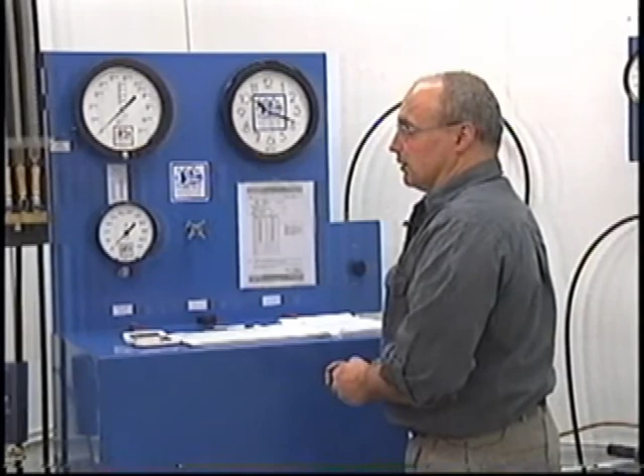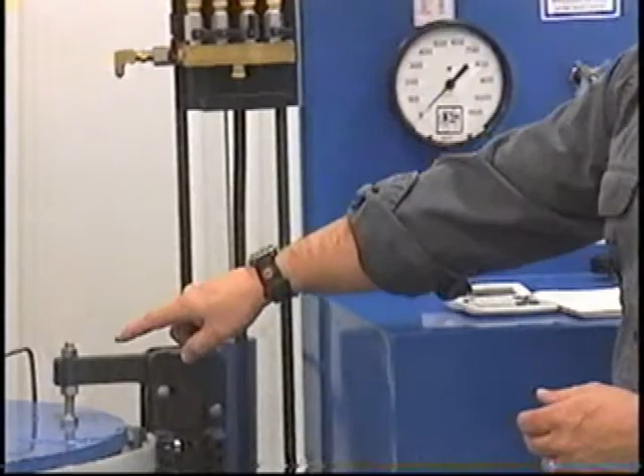The first step is you have your calibrated cylinder loaded into the water jacket. You have purged all the air out of that calibrated cylinder by opening up the low pressure bleed valve, turning on your water to the water jacket. Once water comes out of that bleed valve and goes up your burette that you've selected, you know that there is nothing but water left in that water jacket.

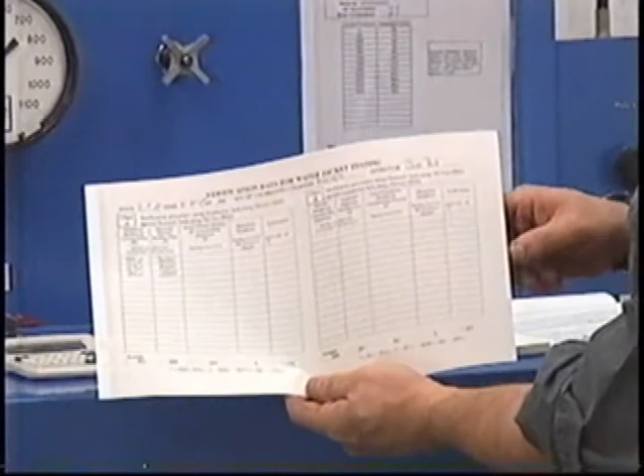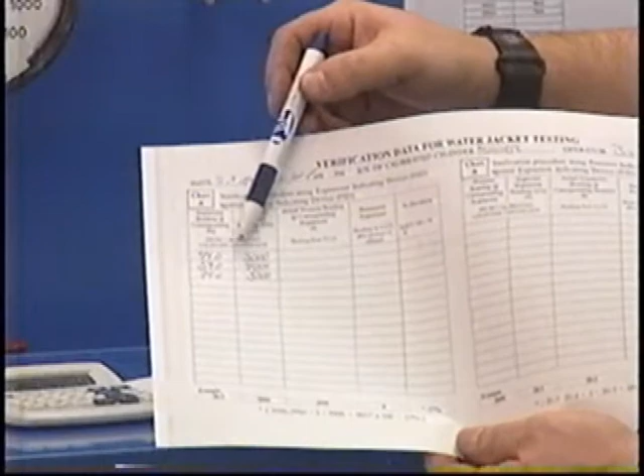Hydrotest has produced a form for the verification procedure, and this form must be kept on file. For this exercise, we're going to verify at 3,000, 4,000, and 5,000 psi. Our expected expansion reading at 3,000 is 44 cc's. At 4,000 it's 59 cc's, and at 5,000 it's 74 cc's. We got those readings from our calibration certificate.

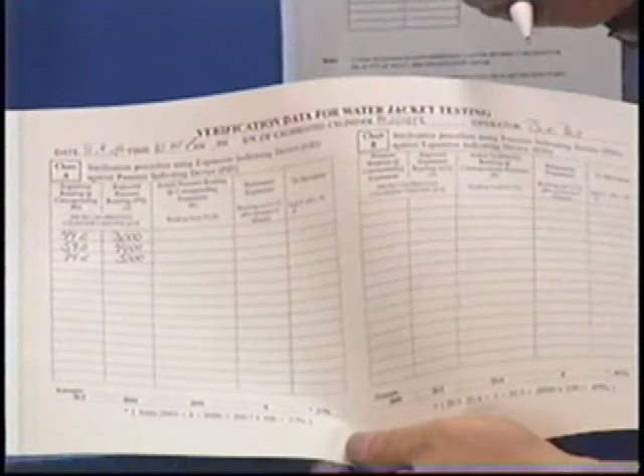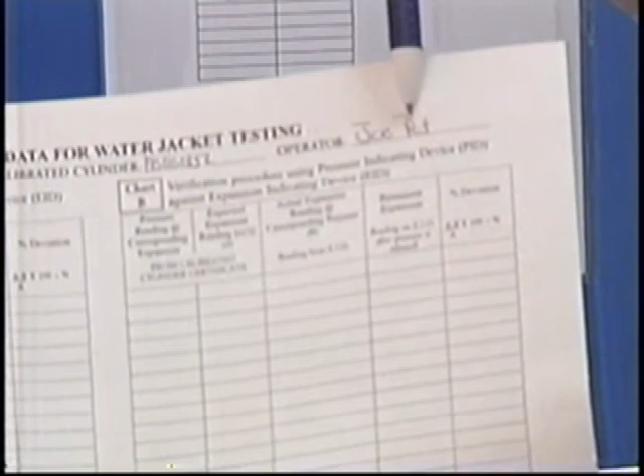On the verification form, you want to fill out the date, the time, the serial number of the calibrated cylinder, and the operator's name. There are two ways to run the verification procedure. The first way is Chart A, where we're going to bring up a known value of our expansion, check our pressure gauge, and make sure that we're within 1% of that pressure.

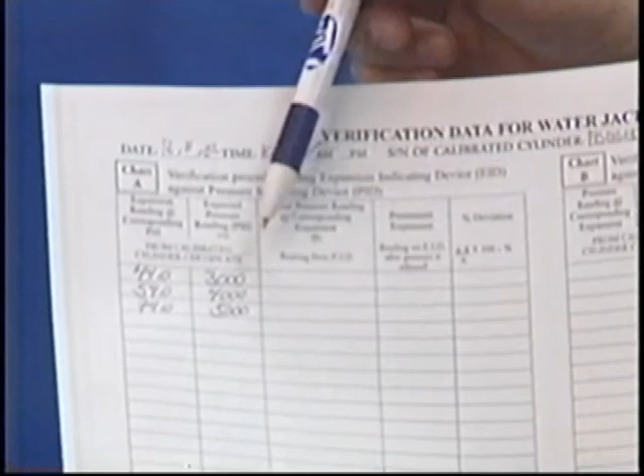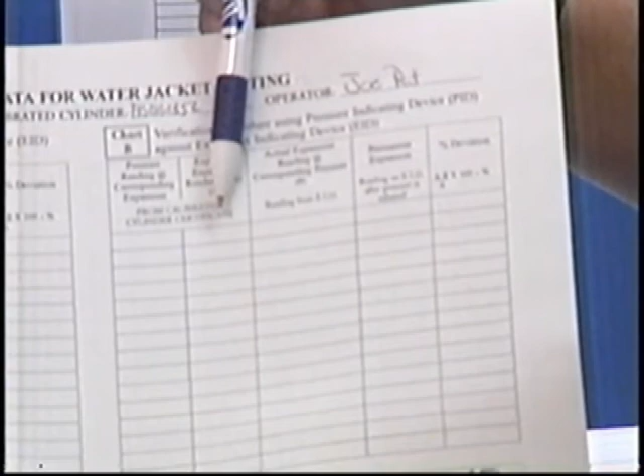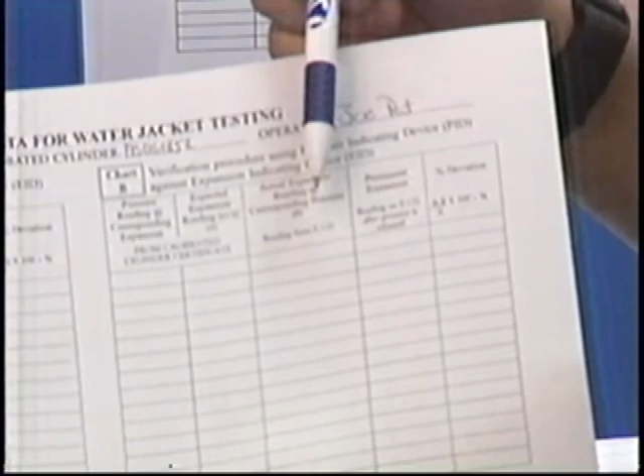Chart B asks you for the pressure. We're going to go to a certain pressure, go to an expansion value, and make sure that that expansion value is within 1% of what our calibrated cylinder chart says it should be. Regardless of the method, after relieving the pressure, you must come back down to 0. Again, for this exercise, we're going to go to 3,000, 4,000, and 5,000.

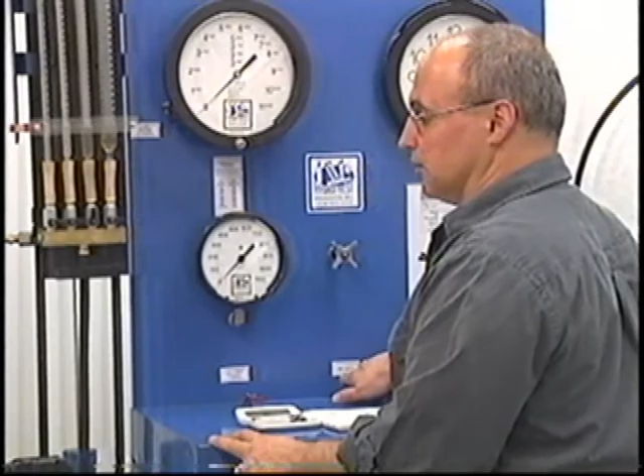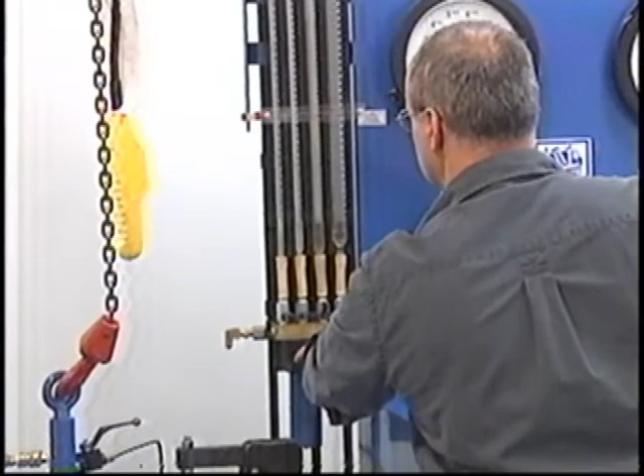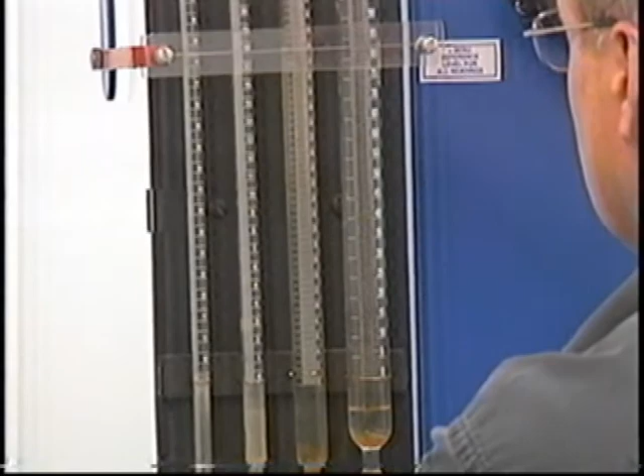I will use the Chart A method first. My first expansion reading at 3,000 psi is 44 cc's. I will bring the burette board down to 44 cc's and start up the pump. When the water level reaches 44 cc's, I will then shut off the pump, slightly tap the gauge to relieve the pressure, and in this case my reading is exactly 3,000. I will write that figure down,

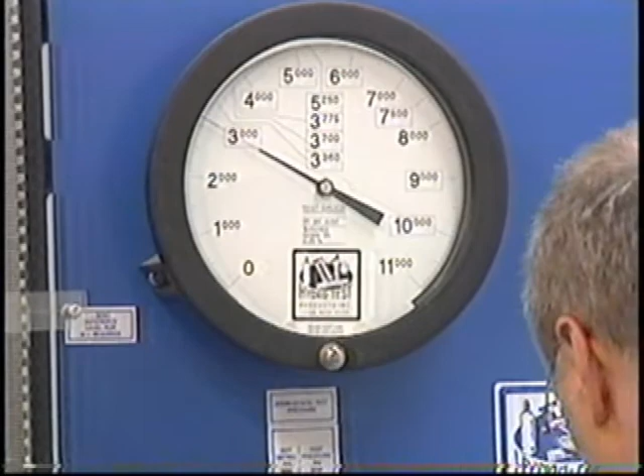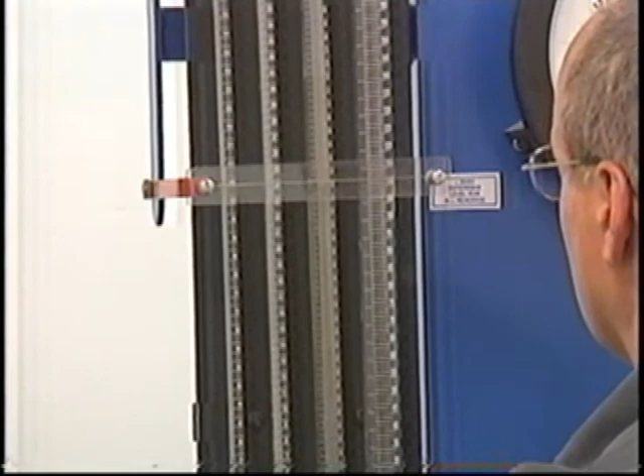bring the burette board down to my next reading, which is 59 cc's, start the pump, and when the water level reaches 59 cc's, slightly tap the gauge, and I should be within 1% of 4,000. In this case, I'm right at 4,000.

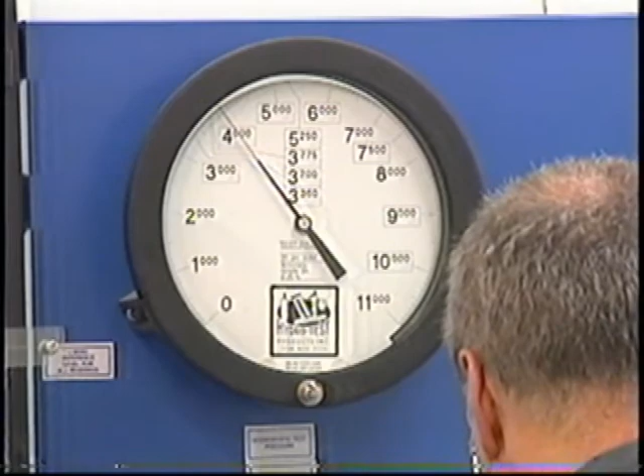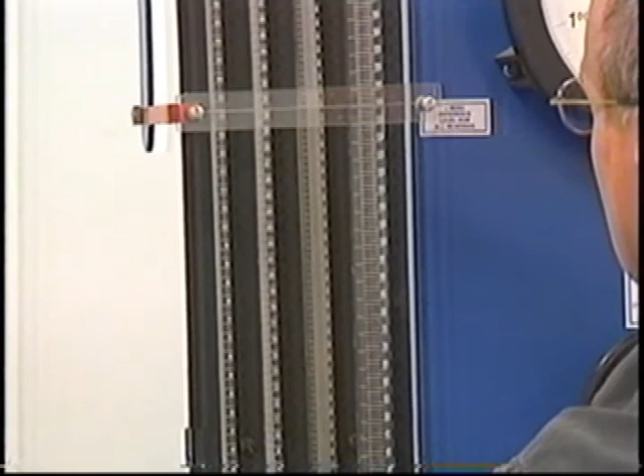Bring the burette board down to my next reading, which is 74.0 cc's. And when the water level reaches 74 cc's, stop the pump, slightly tap the gauge, and in this case I'm at 4,980 psi, so I do have a deviation.

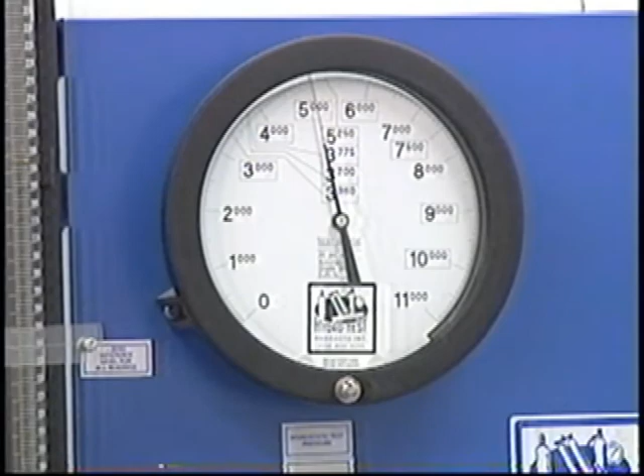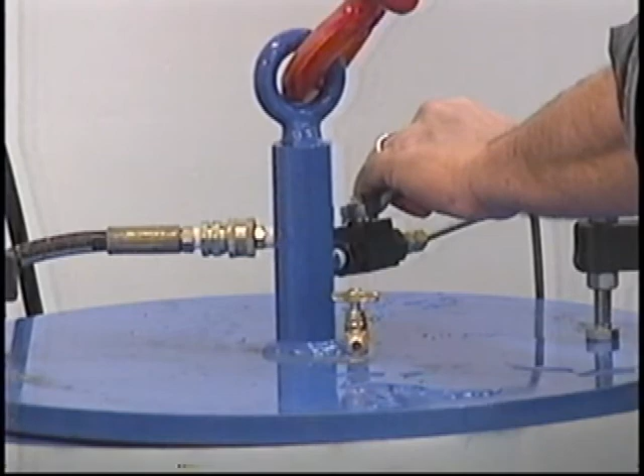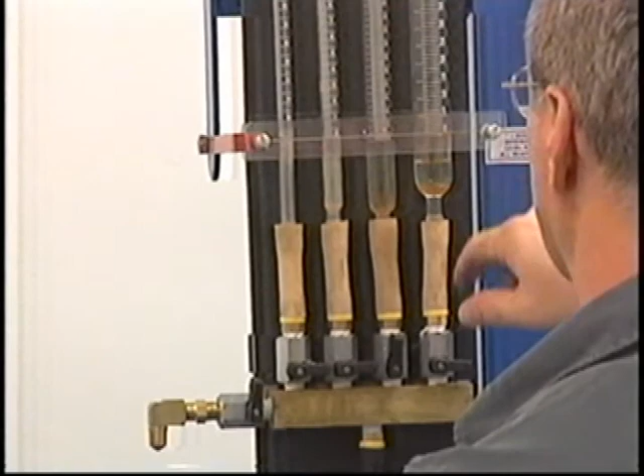I'll then relieve the pressure by turning off the valve that controls water to the pump and cylinder. Slowly open up the high pressure bleed valve on the water jacket lid. Raise the burette board back up to 0. And verify that with no pressure on the system, I have come back down to 0. And I have.

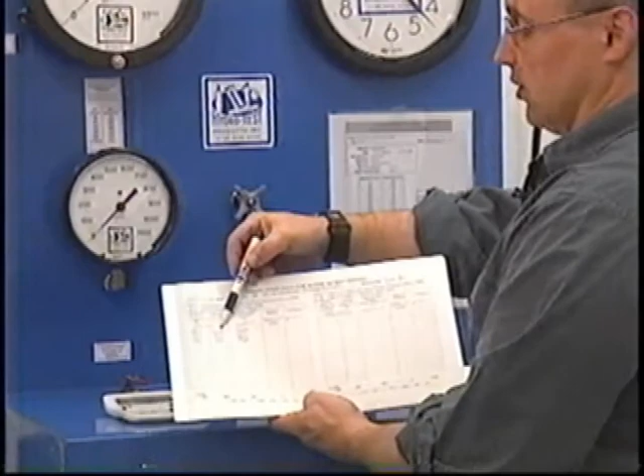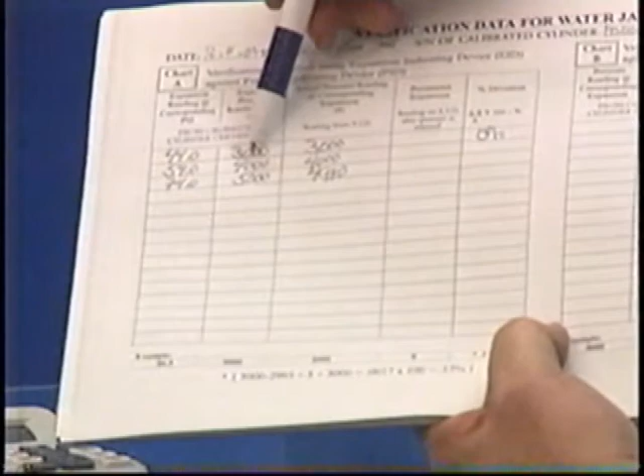We now have to do a little bit of math to make sure that we're within the 1% accuracy. At 3,000 psi, we were supposed to have 44 cc's of expansion. We hit right at 3,000. Our deviation would be 0%. And that would be the same with 4,000. At 59 cc's, we should have been within 1% of 4,000. We were right at 4,000. We have 0% deviation.

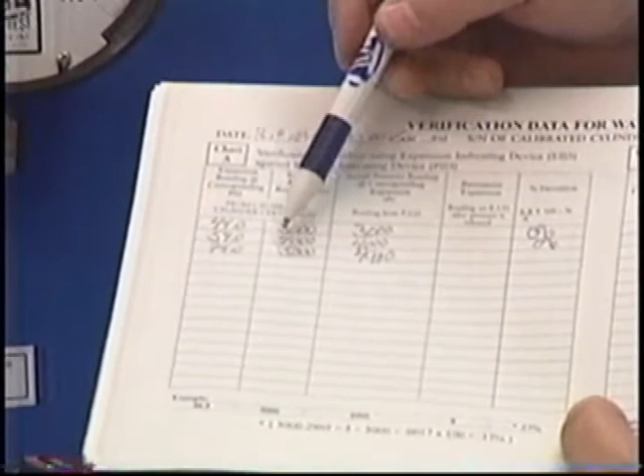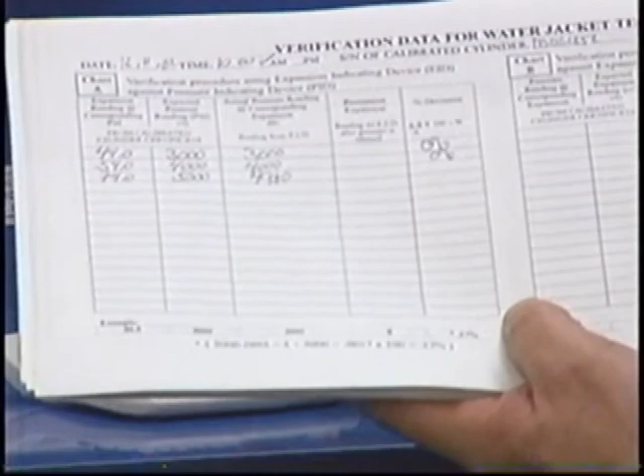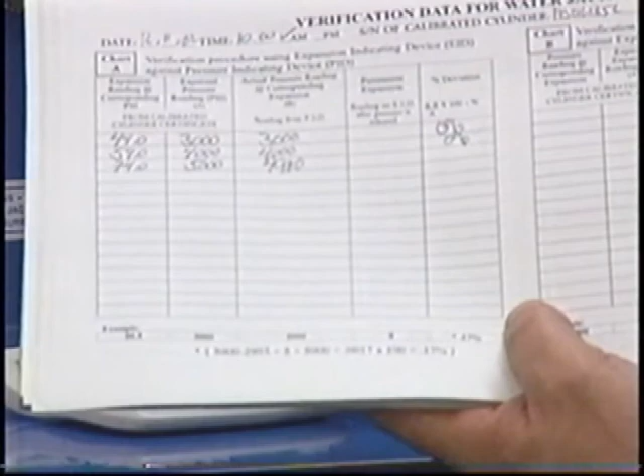At 5,000, we should have been at 74 cc's. We should have been at 5,000 psi. We actually came up to 4,980. We need to figure out if we're within 1%. To do that, you take the larger number, which in this case would be 5,000, minus the smaller number, which is 4,980. Take that figure and divide it by what you should have been at, which in this case is 5,000, and times that by 100 to express it as a percentage, and we are off by 0.4%. That is well within the 1% allowable by DOT.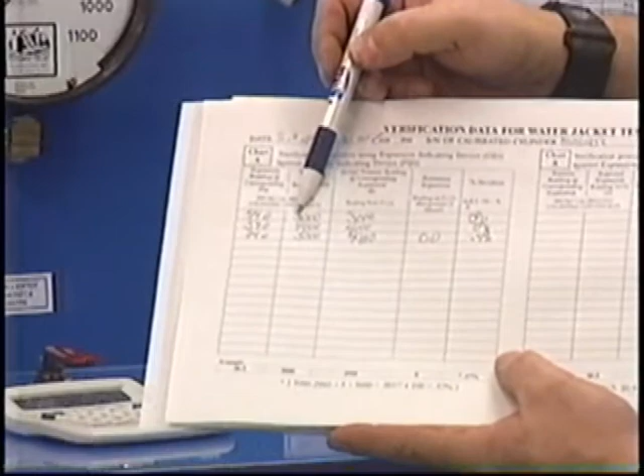At the last reading, you want to put in exactly what you came back to when you relieved the pressure, and in this case it was 0. And based upon our verification, on this day we would be allowed to test in a range from 3,000 psi all the way up to 5,500 psi.

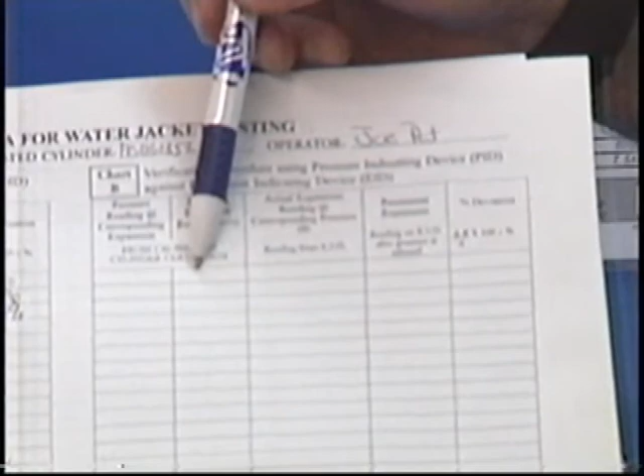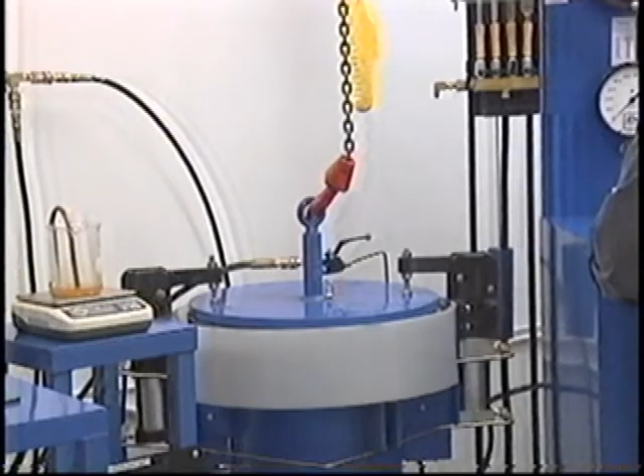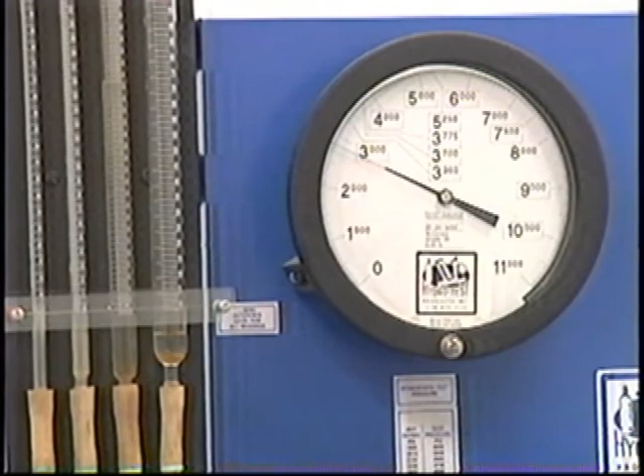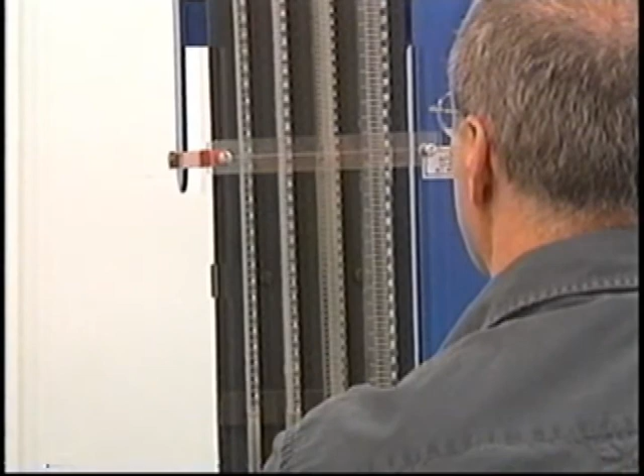The next method is going to be using Chart B, where we're going to bring it up to a known pressure on our pressure gauge and check the expansion value to make sure we're within 1% of that expansion. And again, our first reading is going to be at 3,000 psi. And this time, instead of looking at the water level in the burette, we're going to go right by the gauge. And at 3,000 psi, we then slide the burette board down to our eye level, and we take our reading. And in this case, I am at 43.8.

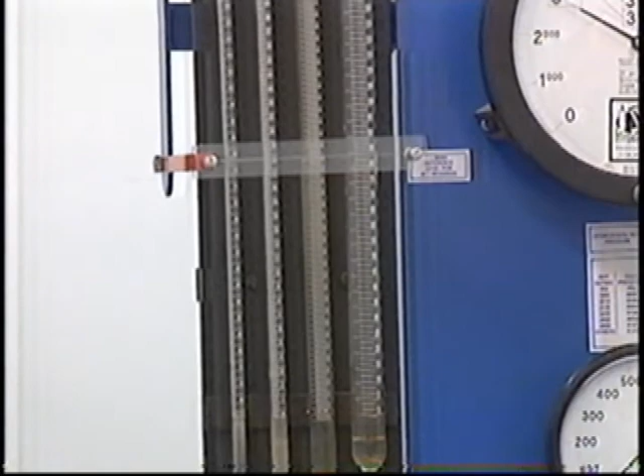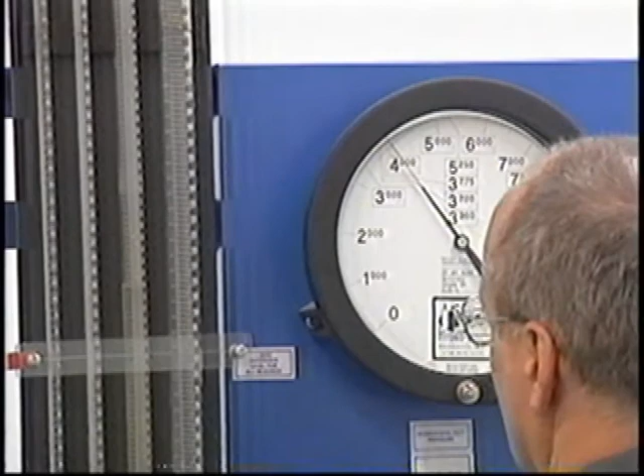And the next increment, we're going to go to 4,000 psi. And at 4,000 psi, we should be at 59 cc's. And with the gauge reading 4,000, we are at 59 cc's. And our final figure would be at 5,000 psi, where we should be at 74 cc's. At 5,000 psi, we are right at 74 cc's.

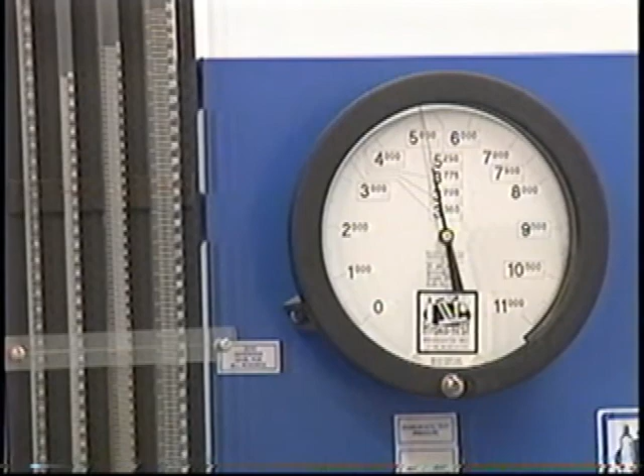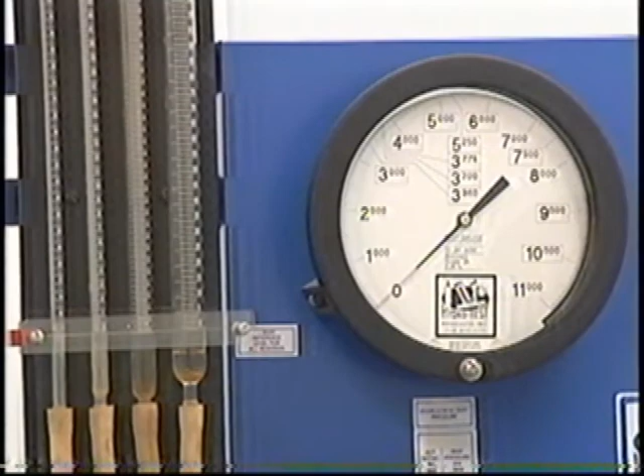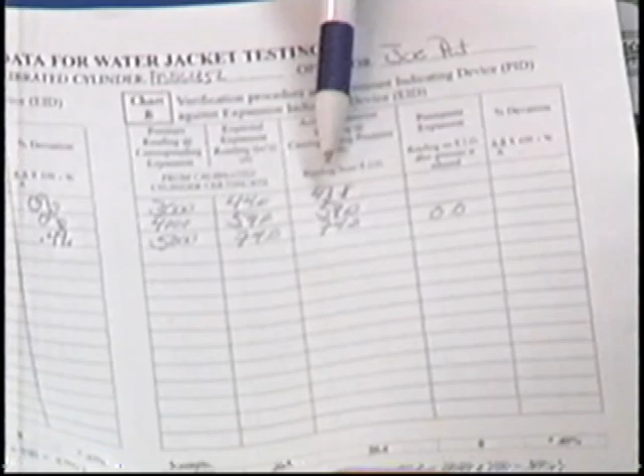And again, we must relieve the pressure, making sure that we come back down to 0. And as you can see, we are at 0. So in this example, our first reading was 3,000. We should have had 44 cc's of expansion. We actually came out to 43.8. We do have a deviation.

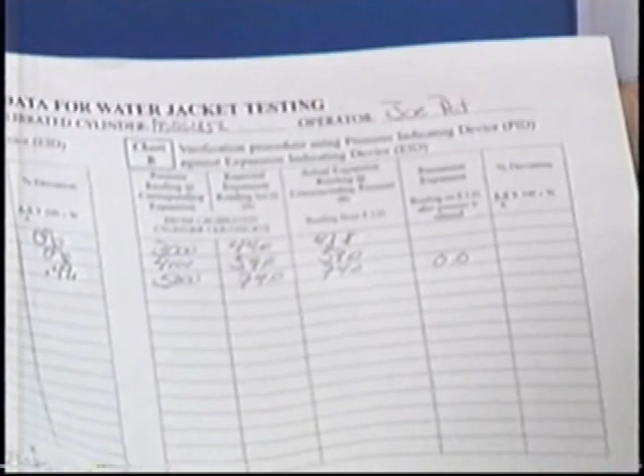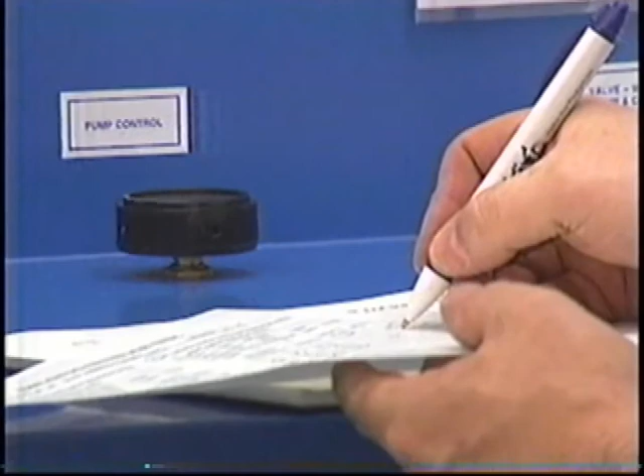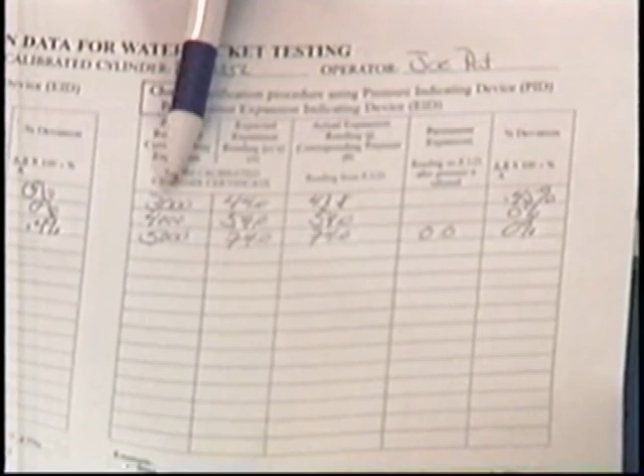Same math. We take the larger number, which is 44, minus 43.8, divide that by what we should have been at, which was 44, and then times that by 100 to express it as a percentage, and we're off by 0.45, well within the 1%. Our next two readings at 4,000 and 5,000, there was no deviation, so it's 0% deviation. Therefore, again, based upon our verification procedures, we're okay to test that day from a range of 3,000 to 5,500 psi.